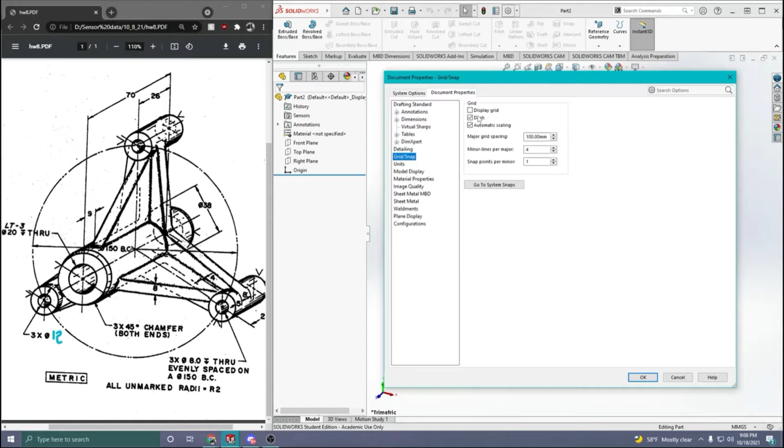All right, I'm going to show you guys how to do the homework 8 in class assignment. I'm going to start with, let's see, this part right here. And this is in the metric system. So I'm going to go into my settings, make sure everything is appropriate. So millimeters. I'm going to turn on my grid. So I'm all set up.

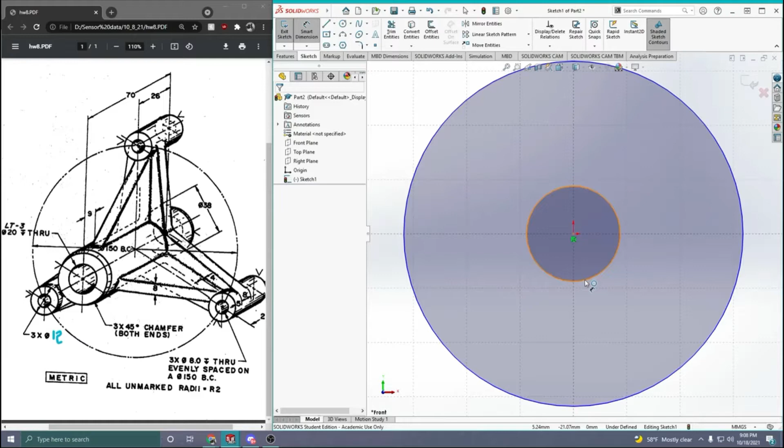I'm just going to start by making this center cylinder right here. So I'm going to put that on the front plane. And I'm just going to plop in 2 circles here. I'm going to make these dimensions appropriate. So it looks like this right here has a diameter of 20. So change that to 20. And this one right here has a diameter of, what's it at? 38.

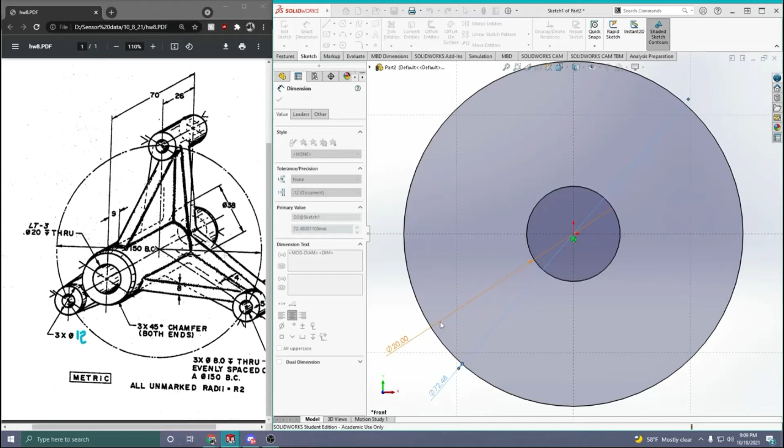All right, now I'm just going to extrude that. I'm going to actually flip it around because I want it going out the back, just for my preference. And this is going to be 70 millimeters long. So there we go. Now I need to add on these, where are they at? So under fillet here, you have the chamfer. Add that on here. I need to add it there and also right there.

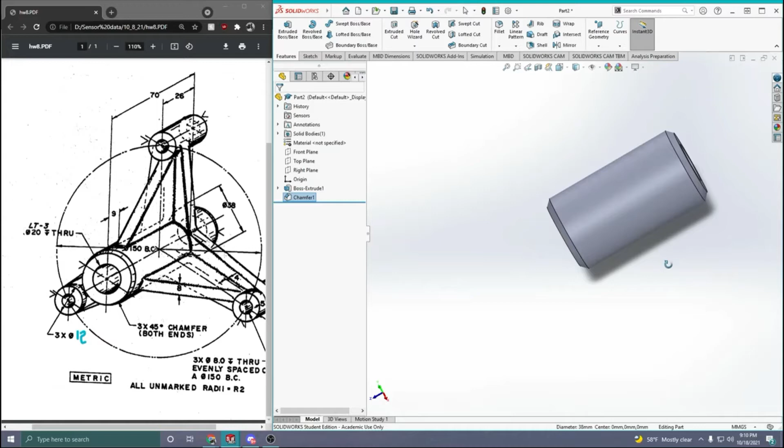And based on this text right here, it is 3 millimeters at a 45-degree angle. So we'll add that on there. And now we have our centerpiece. So this is what it should have right now. For this next part, it's going to be easy.

It's easier for me to just look at these dimensions right here and make a reference plane and go based off of that. I tried going based off of the bottom part of this piece and working my way up, but for me it's just so much easier to get a reference plane based off of these numbers subtracted from each other. So, for example, this right here, the bottom of the cylinder is lined up also with the bottom of the cylinder because the entire length of the cylinder is 70, the entire length of this is 26, and they're both lined up right here, which translates over here.

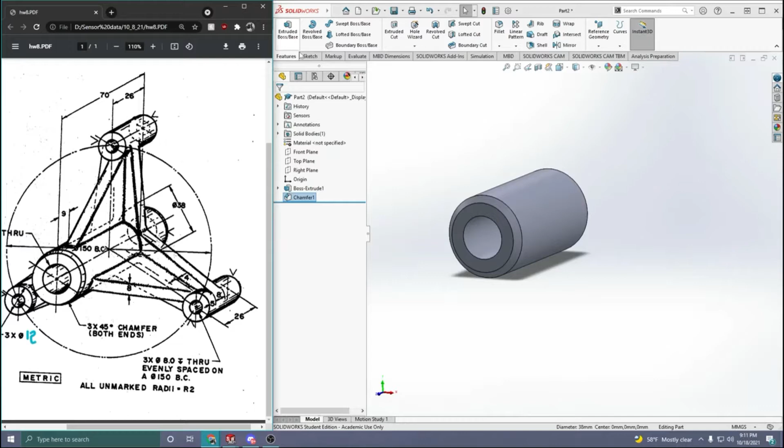So the top of the cylinder from this rib, or from where it comes out on this part right here is 5, and then the thickness of this right here is 8. So if we add this together, it's 13, which means that this should be coming up 8 millimeters from 13 millimeters at the bottom of this. So essentially, we're just going to create a reference plane in the middle area where this is going to need to be at, which is going to be 13 millimeters from the bottom of the overall cylinder. Hopefully that made sense to you. If not, I'm just going to show you how I'm going to do it.

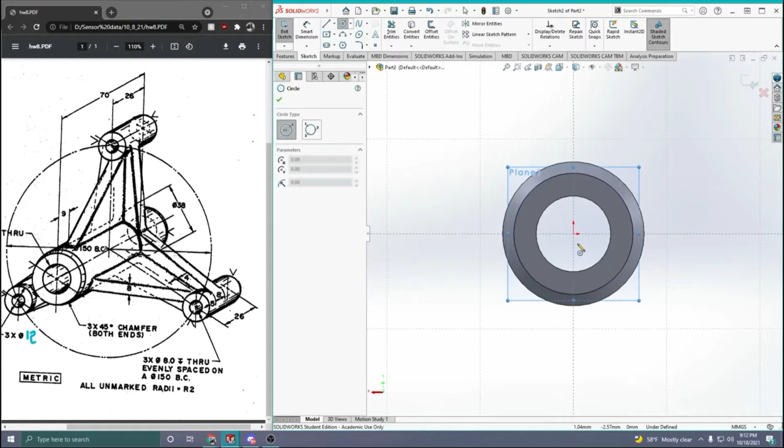So I'm going to create a reference geometry. I'm going to use the bottom of this. We're going to flip it around. And it's going to need to be 13 millimeters up, like that. And now I'm going to add in a circle for reference right here. I'm going to make it appropriate dimensions, which is right here, 150.

And then I'm going to change this to be a construction line. So I click on it and click it to be construction geometry. And now I'm going to create this cylinder piece right here. So I'm going to line it up and see where it snaps on right there. I'm going to pull it out, make a big circle, make a smaller circle. And now I'm going to add in the appropriate dimensions.

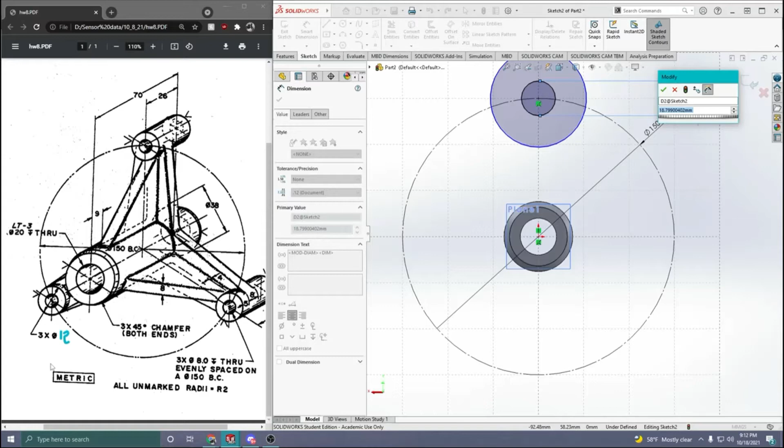So the dimension for the smaller circle right here, I believe is 8 based off of this. I believe it should be 8 millimeters in diameter. So we'll pop the 8 in, and this should be 12. I got that 12 from right here, this dimension right here.

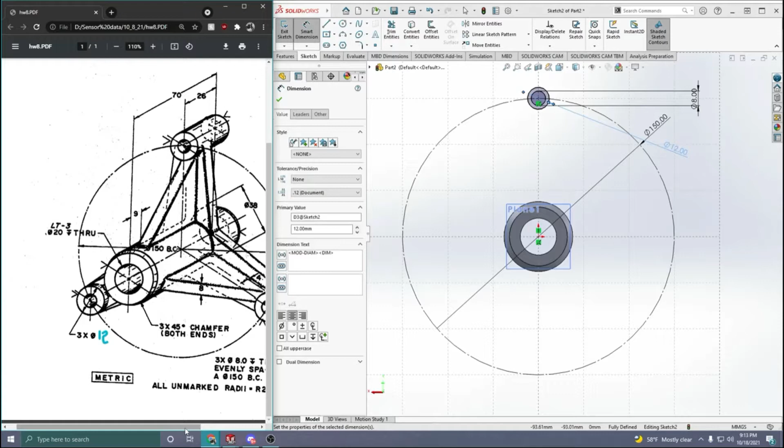Right, and now I'm just going to take a look at this, and I can now extrude this, except I do not need to extrude it that far, and I also need to extrude it from the mid plane, because technically we're in the middle right here. This should be the middle measurement where we put this reference plane at, which was 13 millimeters up, which is half of this total length.

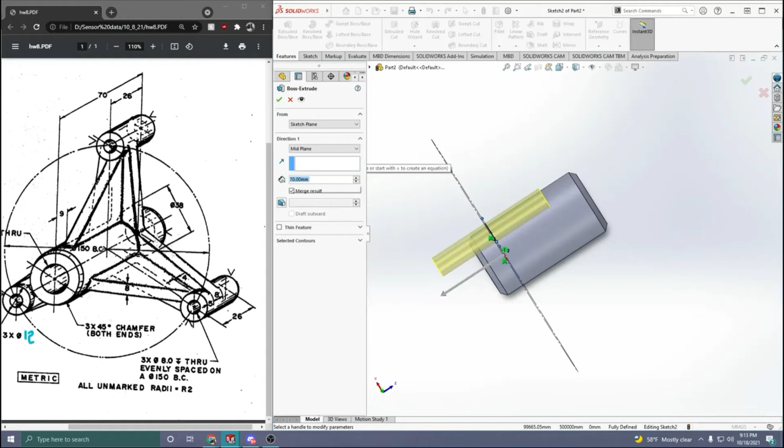So the total length for this is going to be 26, right? So put in 26, and this reference plane is 13 millimeters up. And if we are extruding it in both directions, 13 millimeters, it's going to have an overall length of 26. So that's how I'm doing this. And let's hit OK.

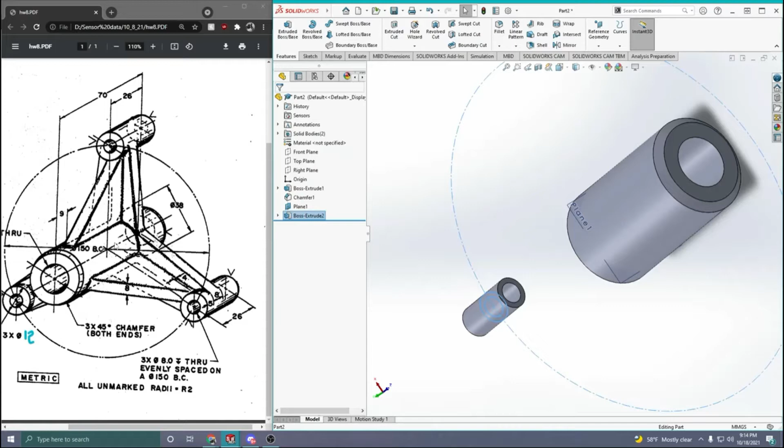Now for this next part, I'm going to create this part right here that connects the smaller cylinder to the bigger cylinder. I'm going to do so by using the same reference plane, so I can hit sketch and choose that reference plane.

I'm going to have it snap onto the cylinder, snap onto that one, snap onto the cylinder, snap onto that one.

Now I'm going to select them, and as I hold control, I'm going to click on this line, then click on the cylinder, and make it tangent. I'm going to do the same for both lines and both cylinders, just holding control and clicking on the line and the cylinder, then selecting tangent. That should be how we want it to be.

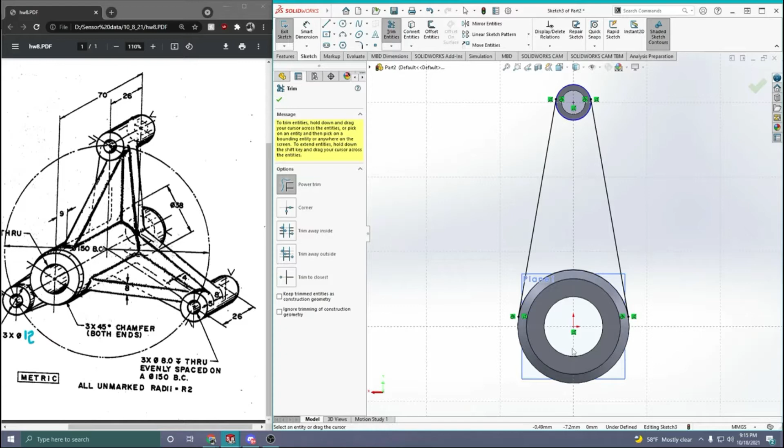The problem is this is not a complete sketch right here, so I can't extrude it. So I actually have to trace over these circles right here and go back and edit them so they are still filled in. I'm just creating a circle on each of these at the same dimensions that lines up. Now what I can do is go in and trim it, so I'll trim this from the back and also trim this from the top. It will now make a complete enclosed surface of just this shape right here that we want.

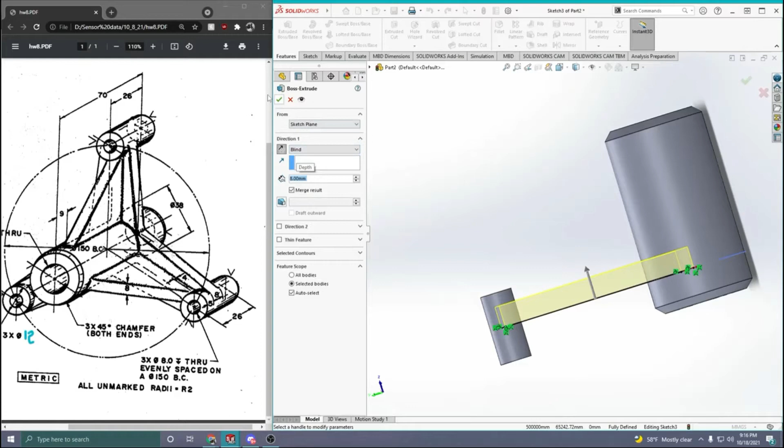That's really helpful, and now I'm just going to extrude this. So we are 13 millimeters up, right, and that's where the bottom of this starts, right here. So we need this to go in this direction, and we need it to go 8 millimeters. We will hit OK on that. Ta-da!

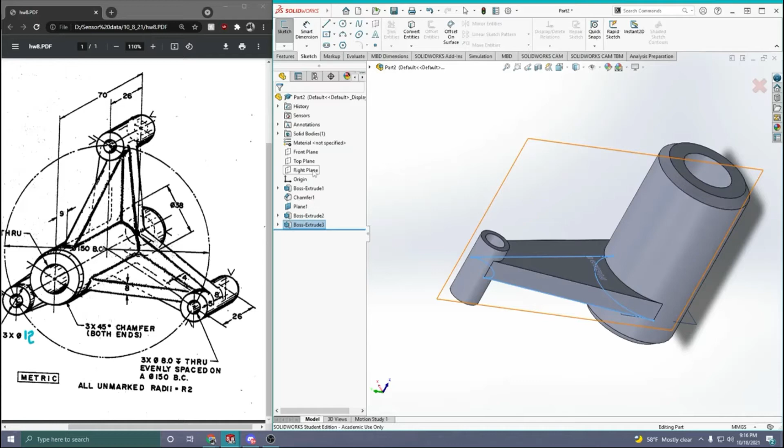So now we need to add this rib, which should be pretty simple. We're going to create a sketch. I'm going to select on this feature manager design tree so I can get a look at the different planes. The plane I'm going to want to select looks like the right plane right here.

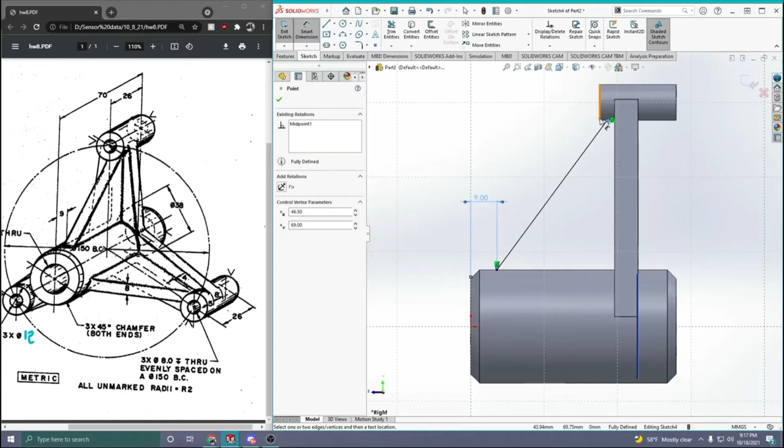So I'm just going to draw a line that connects right here and connects out here somewhere. Now I can put in the smart dimension for this. From here to here, it needs to be 9 millimeters. Get that 9 millimeters from this measurement right here. And from here to here, that needs to be 4. Oh, must have clicked on something wrong.

From here to here. Let's see. Oh, it's a midpoint, okay. I'm going to delete that relation. I don't want that to be a midpoint. I just want it to be coincident with that.

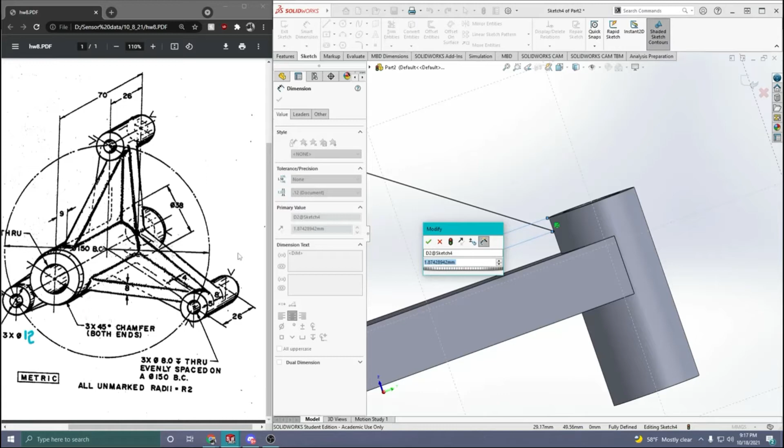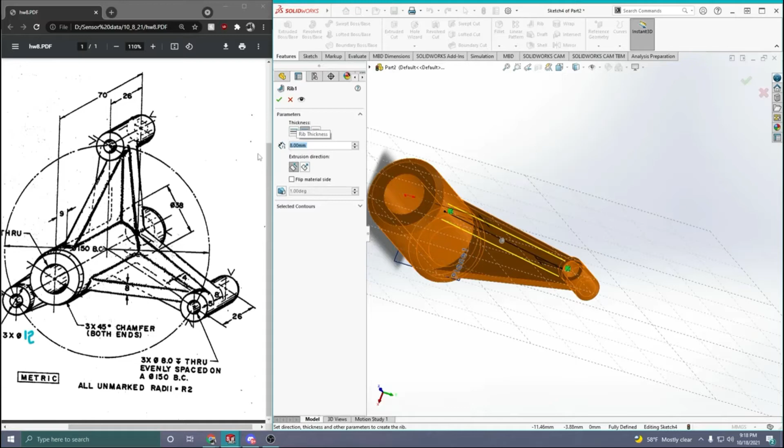So from here to here, ta-da, that is going to be 4 millimeters, like so. So now we just have this line right here that's going to help us whenever we use this rib tool. Go over to features, select the rib tool, and it automatically selects the line. This rib is going to be 8 millimeters right here, so we'll change that to 8. We're just going to select OK. Now we pretty much have the general shape of what this should look like.

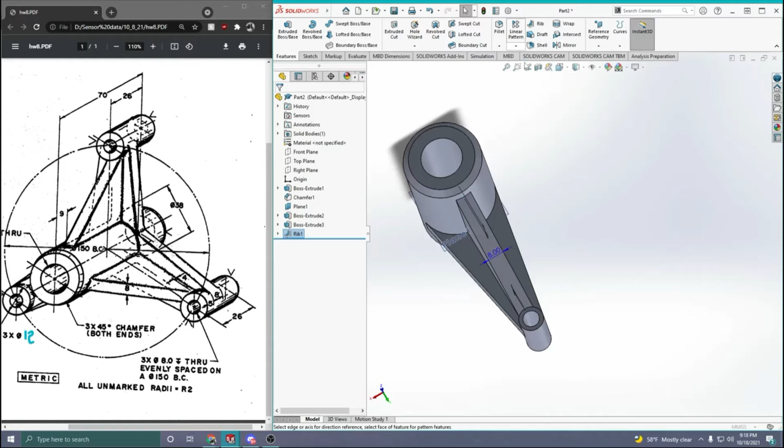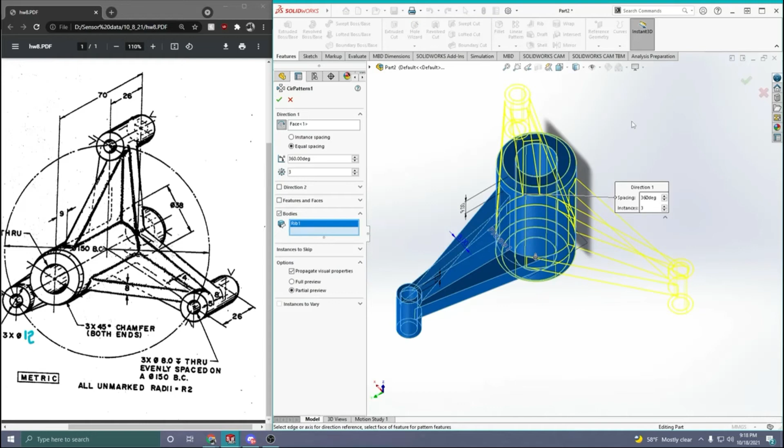All we have to do is have this equally spaced out 2 more times, which is pretty simple. So all we do is go over here to the linear pattern, and we're going to select circular pattern. For where we're going to be rotating it about, just choose one of these circles right here—I like to choose the inside circle, for example. For what we're going to be rotating around, deselect features and faces, and we're going to select the entire body. So we're just going to select this whole body, and it's going to rotate it around 3 times, which is going to overlap over top itself, but it doesn't matter because that's what we need it to do. Then we're going to hit yes, and now this is what your final piece should look like.

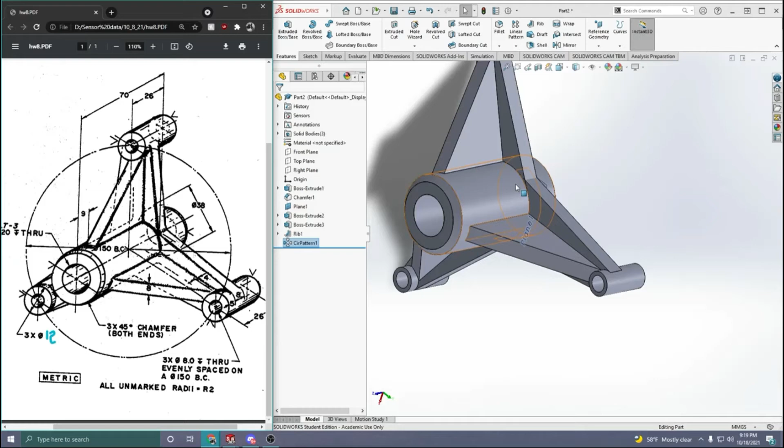Hopefully I did this correctly. This is what I think he wants us to do, just based on the dimensions I was given and based on my perception of it. So hopefully this is what he wants us to do, but that's how I did this. Maybe it'll help you do yours.

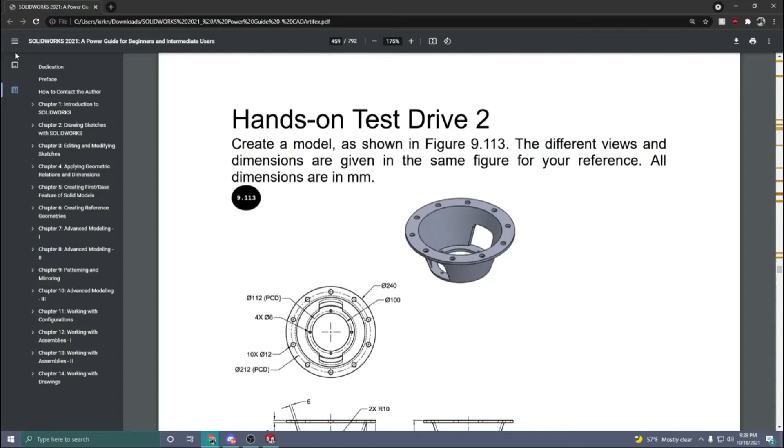All right, and I'm going to show you guys how to make this piece right here. This is Chapter 9, Hands-on Test Drive 3, I believe. Let's see—yeah, so Chapter 9, Hands-on Test Drive 3 right here. So I'll pop that to the side and set this back up.

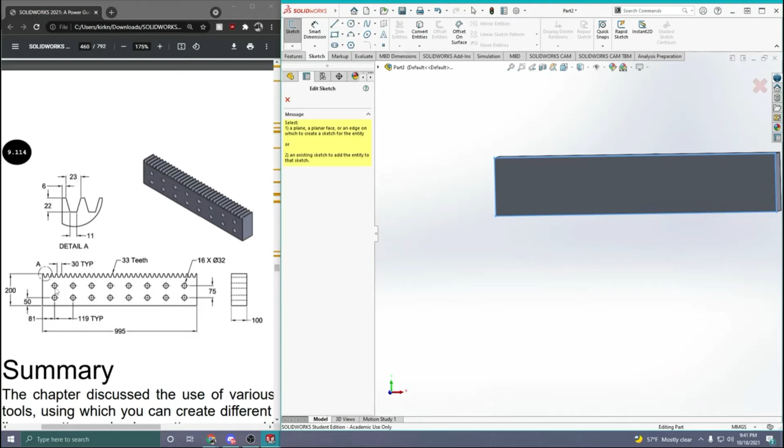Now I can go and start working on adding these holes in right here. I'm going to add 2 of the holes on, and then we're just going to pattern those straight across. So I'm just going to drop in a circle there, and now I can use the smart dimensions to line it up properly.

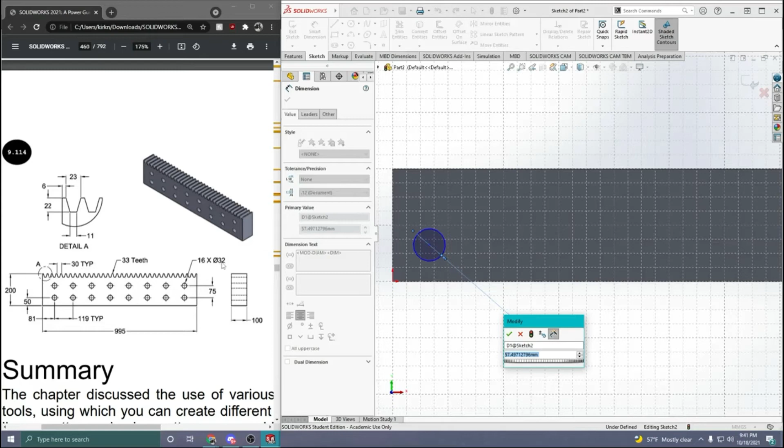So first the hole is going to have a diameter of 32. And the center of that hole is going to be 81 millimeters to the side, and it is going to be 50 millimeters up.

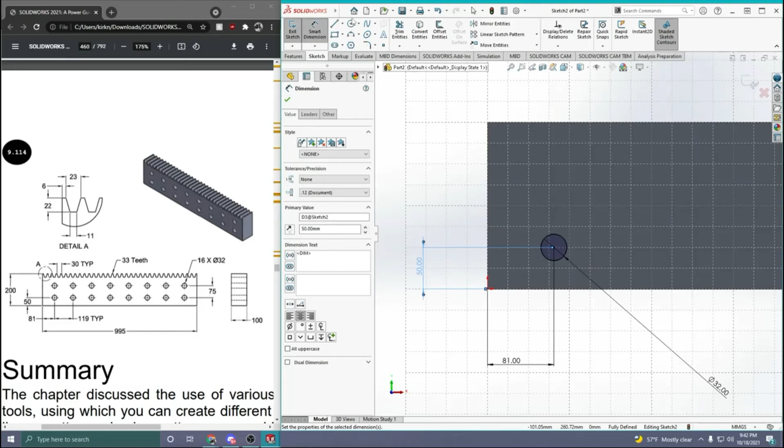Now I can add another circle in. I guess I should line it up actually, so I'll line it up with this one.

And I'm going to give it, well, I could actually just make it equal, right? So I'll hit Control on these two, and I'm going to make it equal radius, and let's see if I can.

Should be lined up, but I want to try to add a relation into it, so this one should be vertical from it. And then I can go in and add this smart dimension in here to have the specific dimension, which is 75. So I'll add 75 in, and that is how those 2 circles should look.

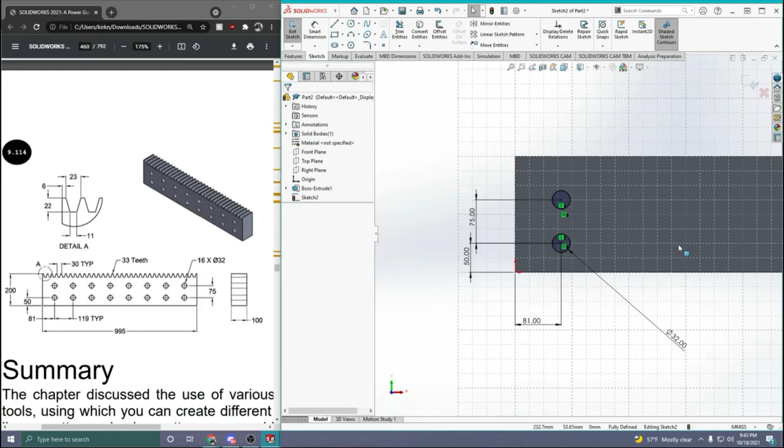So now we're just going to extrude cut them through.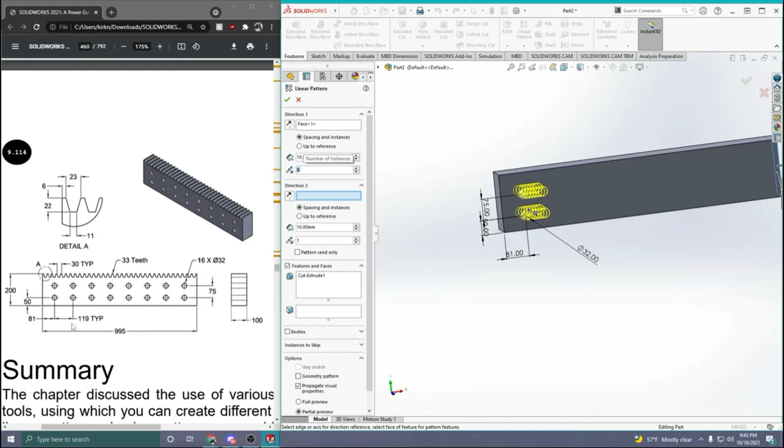And now we're just going to mirror these straight across. So we will come over to the linear pattern, click on that, and the direction we're going to be going in is to this plane over here. There are going to be 16 instances of these holes, but we did 2 of the holes, so there's only going to be 8 instances that we're mirroring. So we'll hit 8, and they are going to be 119 millimeters apart.

Pop that in there, and ta-da! Now we have all our holes.

So now we're going to create the teeth and then mirror the teeth across. So we're just going to sketch on this plane again, and we can come in here and make a rough sketch of this. So it's going to be out a little bit, kind of down, kind of over, kind of up again.

And we'll add in our smart dimensions. So from here to here, that is 6. Then from here up to here, that is 22. And then this is going to be 11.

And then the distance between these 2 points, which is going to be this point, is 23. So let's see, we have 1, 2, 3, 4 dimensions here.

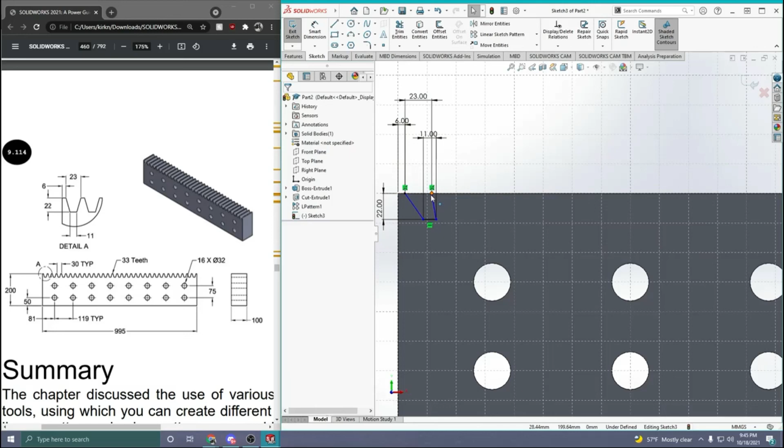So now all we need to do is just make this look pretty. So this should be shifted over, right? Should be over here like this. But how are we going to make these equal each other?

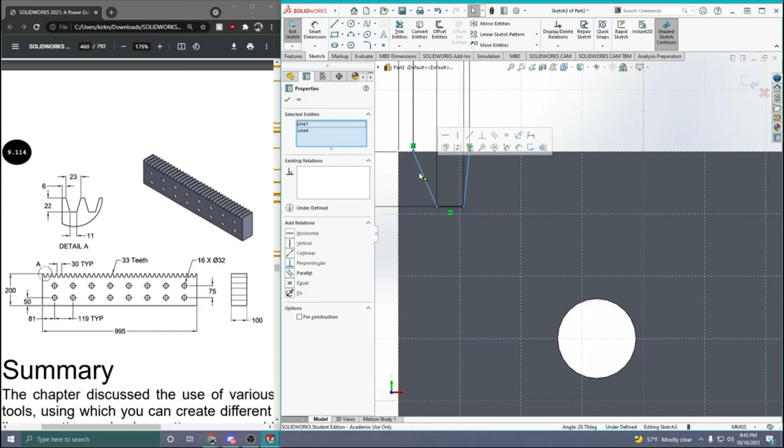Well, we can just click on this line while holding control, and this line while holding control, and we'll just make them equal to each other. So that evens all this out, and this now has the appropriate dimensions, so we can cut it.

So we'll extrude cut it through, and we have made 1 tooth right there.

Now, all we have to do is just recreate that pattern all the way across. So we select the linear pattern up here, and we're patterning it all the way over here.

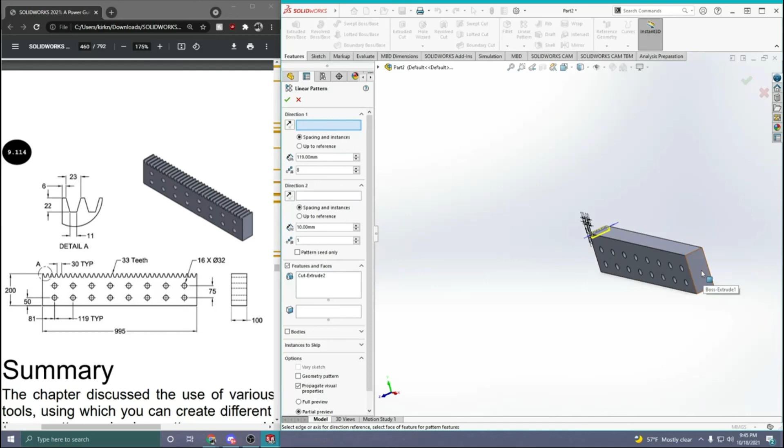And there are 33 teeth, and they are going to be, where is it at? 30, they're going to be spaced out 30 millimeters. So there's 33 teeth, and they're going to be spaced out 30 millimeters.

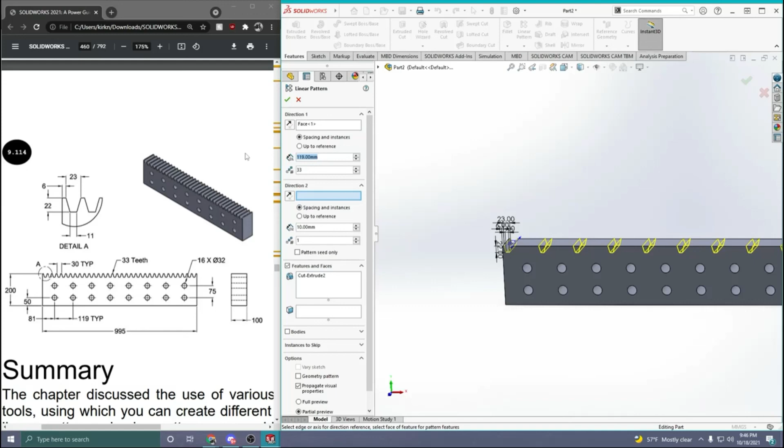And now we just select OK. And we have completed this hands-on test drive.